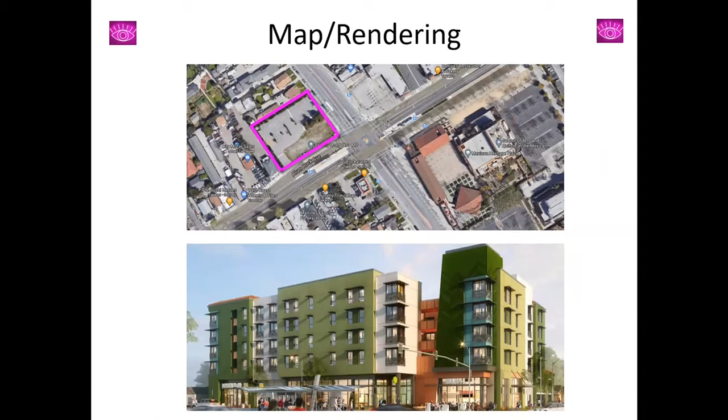We got entitlements for the project in July 2017 and then started the schematic design process. During design development is when we really took the opportunity to analyze the costs and benefits of different building systems in an effort to see if net zero energy would be viable. Sean and I wanted to push the envelope to be as efficient as possible, but also be mindful of costs.

Ultimately, I'm proud to say that the project ended up with an over 40% increase above code in energy efficiency, and it will be certified GreenPoint Rated Platinum, well in excess of the minimum points required.

We unfortunately did not end up with a net zero energy project because it was not financially viable due to a variety of constraints, but there were many lessons learned, and if I were to do it over again and we were to apply those lessons learned, I'm confident that it could have been net zero. That unfortunately can be the impact of the learning curve that happens when you have so many people green to all electric systems on the design team.

I will talk about our challenges with solar in future slides, as that was the primary reason we couldn't get to net zero energy. However, a platinum rating with such high, over 40% above code efficiency was something our entire team was really proud to accomplish.

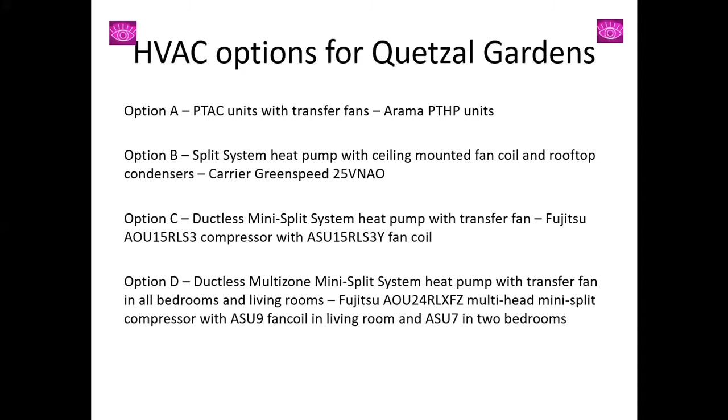So all of these HVAC options are all electric systems, but at different price points and effectiveness of cooling and heating spaces. When we first started the design process, we considered the least cost possible system, which was a through-the-wall packaged terminal heat pump, PTHP, similar to what is found in a hotel room. However, the problem was the through-the-wall PTHP does not insulate the outdoor acoustic noise pollution of the local environment sufficiently. And this Amana option put us in violation of San Jose planning indoor noise standards.

The project lies at the corner of Alum Rock and King Road, both major thoroughfares with high traffic. Alum Rock is actually considered a California State Highway, Route 130. Additionally, this was the first development in any urban village in San Jose, as I mentioned before, and the project was a gateway project to the Little Portugal urban village, and the design is stunning. Adding the through-the-wall PTHPs was going to distract from the beautiful architecture, so it was the least desirable option from an aesthetic standpoint as well. 630K was the lowest pricing option nonetheless, but we could not use it.

After this exercise, and after it was too late to make design changes, Sean informed us of a new Amana PTHP which came to market that had much quieter technology that would have passed San Jose standards. And I believe there was an option that was not through the wall to preserve the beauty of the design. So for those working on project designs right now, going this more affordable route is a very viable option, but it wasn't for us. So next slide, please.

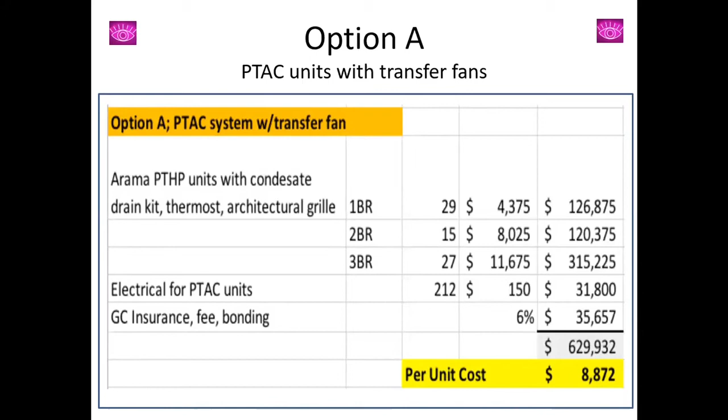And you will learn about that tomorrow morning at 10:40. That's the Innova and also the Olympia that's similar to the Innova, but Yehuda Folda, the general manager and company owner, will be presenting at 10:40 tomorrow morning on that option. Thanks for bringing it up.

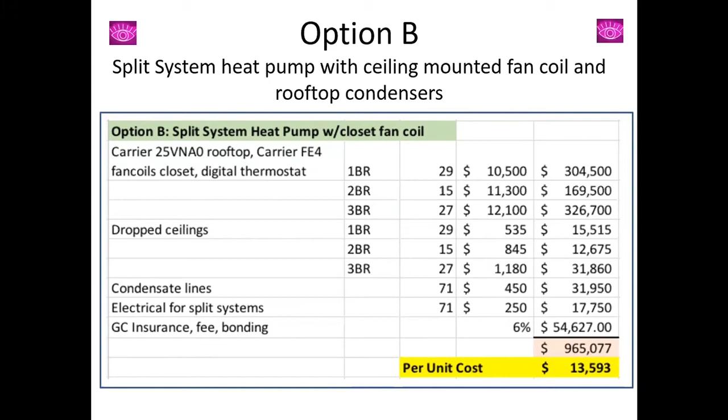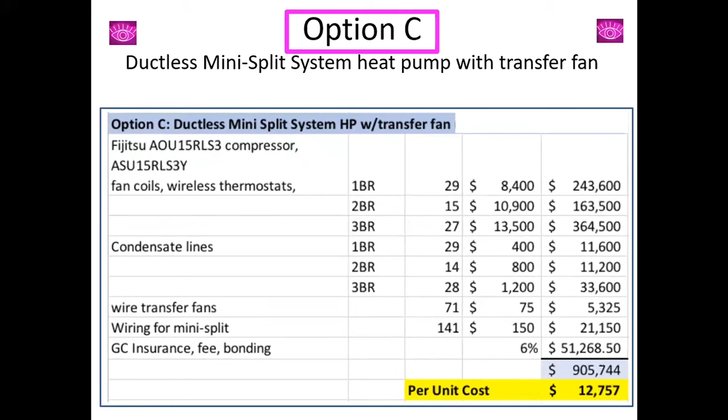Fantastic. Other than the PTHP option, the other three options we considered were split systems. Option B was a split system with a heat pump and traditional ducting. Getting away from ducting was also preferred for aesthetic reasons, but we were still focused on the cost. So next slide, please. Option C, this is what we selected as the final specification. This split system has a single wall-mounted fan coil with transfer fans, as opposed to what you will see in option D, which has multiple fan coils with one in each room. Next slide.

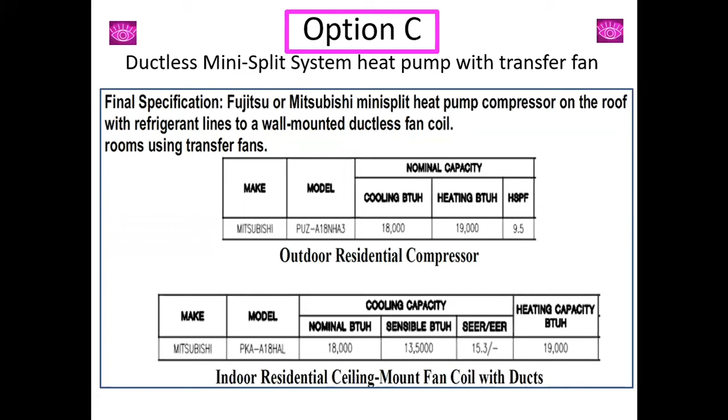These are the specs of the system selected. Cooling BTUs of 18,000 and heating at 19,000. We don't have one in every room like what is shown in option D. There's just one mini split system in the living rooms for the 1-bedroom and 2-bedroom units with transfer fans. However, in the 3-bedroom units, we added a second mini split system in the master bedrooms to ensure those larger units would be cool and hot enough for our residents. Next slide.

Here is option D, which is 200K more than the system we selected. This system would provide the highest comfort. As developers, we need to be mindful of global warming, and that in future years, as we have more really hot days and more fires, these buildings are designed to accommodate these heat waves. And AC has been a luxury to date, especially in the East Bay, I think, but with global warming, it is more and more becoming a necessity to be thinking ahead.

These projects will last for decades, and it will be much harder and more expensive in the future to add HVAC systems than to figure out how to integrate high quality systems now. In retrospect, I would have gone with this system knowing where the budget ended and that we could have afforded it. At another property at RCD that finished construction in Walnut Creek last year, the HVAC systems that were specified didn't have the high BTUs that Quetzal Gardens had spec'd.

Tenants were miserable and complaining during the hot summer days, suffocating in their units, especially during the smoky days during fire season, and they were cold during the wintertime. Property management had to provide space heaters and then cover the added utility costs for tenants. After the fact, the design team had to figure out how to add additional HVAC units only in the studios and small one bedrooms, and it ended up being a major headache and extremely expensive to add after the fact. And there were liability warranty issues as to who was at fault for this design flaw.

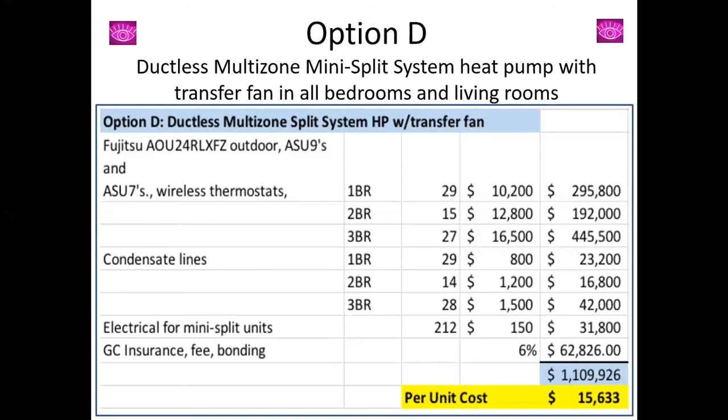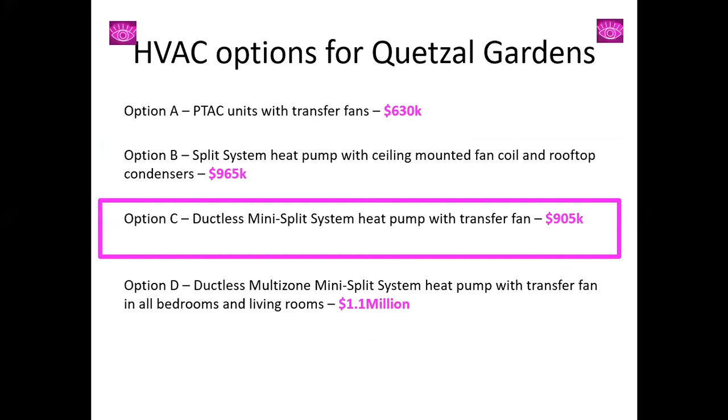On to domestic hot water systems. I will go through the cost breakdowns that we got from our GC. Domestic hot water design took more time than HVAC to evaluate because of the relative unfamiliarity of heat pump water heaters. The majority of the design team, with the exception of Sean, was not very familiar with them. And the design team in total was like 15 people, like 3 from our GC, 2 from ownership, 3+ from architecture, 4+ people from the MEP consultants. We had Sean, we had our solar consultant, a lot of cooks in the kitchen, and we considered many alternatives over a period of months of discussions and cost estimating.

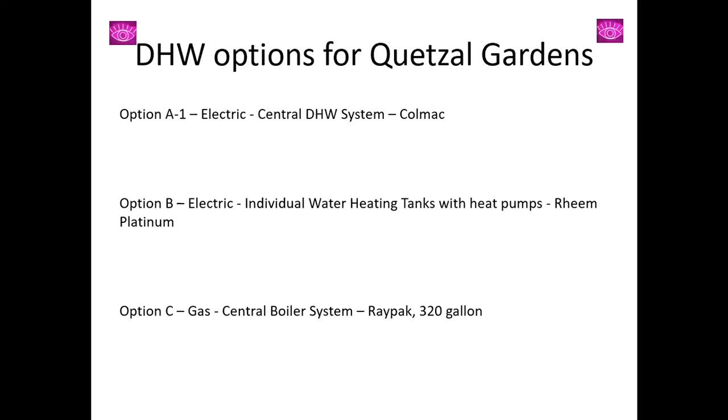I fortunately had the time to delay our design progress and do this exercise, but there are many other projects on tighter schedules who have trouble prioritizing this exercise, and then they just end up going with gas because it's just easier, right? It's easier than spending months trying to evaluate what the heck are these hot water heaters with heat pumps. But so these are the 3 options we explored. Next slide.

We attempted to consider maintenance costs as well involved in repairing a central boiler system versus individual water heaters. And central systems require routine maintenance. Typically, you need to hire a third-party vendor. Maintenance staff aren't trained to do it. When an issue occurs on the central system, all residents are impacted. So from a maintenance perspective and a repair perspective, individual hot water heaters seem like the best route to go.

Time will tell. The property management team was really nervous since they were not familiar with any of these systems, but ultimately they realized that we are in a time of adopting new technology and they'll just need to be trained accordingly.

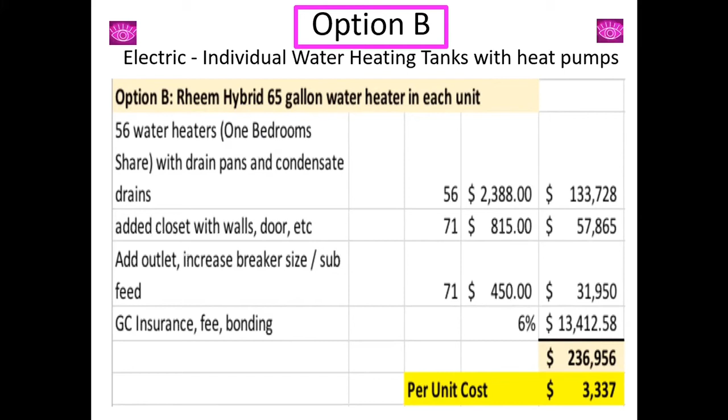And it really felt like the GC had a couple other all-electric projects that were going on, and they were having some challenges during construction with them. And so I did get a sense that they weren't going out of their way to prove that gas is actually in the same ballpark as electric. Next slide.

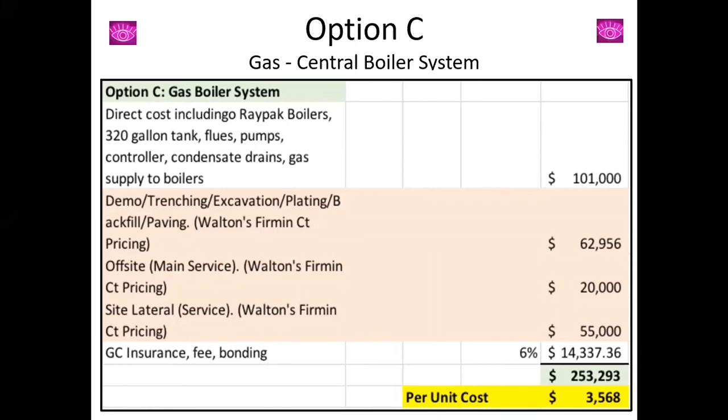If I were to have made a decision based on just the GC's pricing, with gas as the cheapest option, it looked like we would have paid a premium of about $100,000 to go all electric. The entire hard cost for the project was $41.5 million. So that is really not a big premium to pay, especially when there are so many other VE decisions, 50K here, 100K here, to be made.

We had an issue with being almost at capacity with our electrical load on the one transformer that we had. And so it's 50K to add an extra transformer, and I made an executive decision to do that just because it seemed like we were at risk with the systems we had. And also, the fact that electric vehicles are becoming more and more prominent in the marketplace, I want to be looking ahead to the future.

I don't know if I'm going to be able to get to it. Looks like we have too much here to talk about. But on my Antioch rehab that I worked with Sean on, one of the reasons we couldn't convert it to all electric was because of the electrical systems and the costs involved to upgrade those. So in total, a worst case scenario of an added premium was $150,000 on this project.

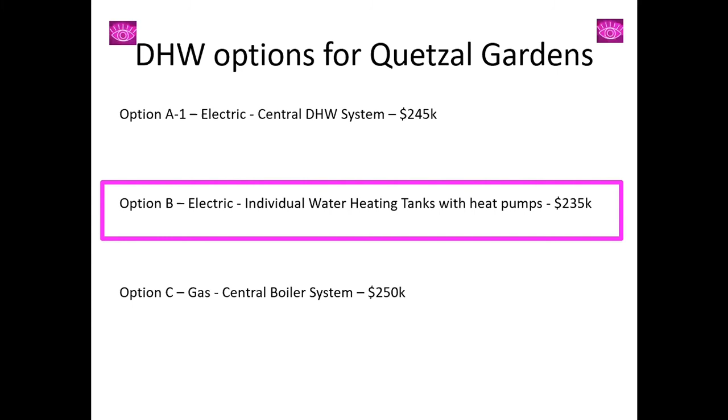Next slide. So lessons learned: we started the cost benefit analysis during the design development phase, and I think we should have started earlier. It took us so long. And then there were some miscommunications. We had wanted to wire the individual hot water heaters to the house meter. That didn't happen because of a miscommunication with MEP. And by the time we figured it out, it was too late in the design process to change it. But if we had started earlier, we would have caught that.

And that would have been a huge help, because if we had taken the hot water utility out of the tenant's utility allowance, then the utility allowance would have been lower and rental revenue would have been higher, and we could have leveraged a higher loan. So it would have helped finance any upfront costs on, say, solar. So that was a big lesson learned.

And the coordination, hands down, I think that's the biggest reason for resistance, why people don't do it. It is a lot more time consuming as people are learning about these systems, but I've done it once, so it's going to be easier, right? And then I would encourage folks to look at the UAs and CUAC as a potential financing mechanism. Getting those utility allowances as low as possible to increase rental revenue is a way to leverage a higher loan, and that can be a meaningful way of offsetting any added costs, in particular on the solar part.

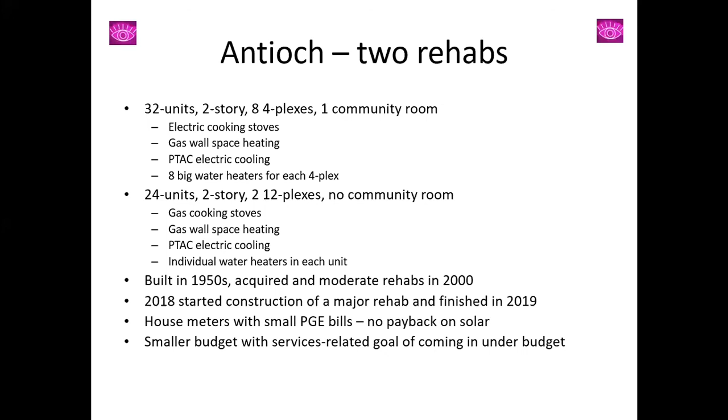Yeah, so the house load was really small. There was no payback on the solar, challenges with the OAC team coordination, asbestos in the walls, and the cost to upgrade all the electrical systems. And I can just run real quickly through affordable housing trends. That's the next slide. You can just glance at this: yes, we're in an early adoption phase, but it's rapidly growing. I think every developer has an all electric, and we're just getting on board. So that's very exciting, which means more data on comps is coming soon.

People are experimenting with a variety of systems in their portfolio, so that when they are in operations, they can figure out which one they actually prefer. And then there's a bit of a wariness on the foreign products, which is an issue because those usually are the most efficient. So that's a challenge that we need to overcome somehow, to get more of those foreign products in the marketplace so that they're more available. And then, yeah, lack of experience is widespread, but it's rapidly changing.